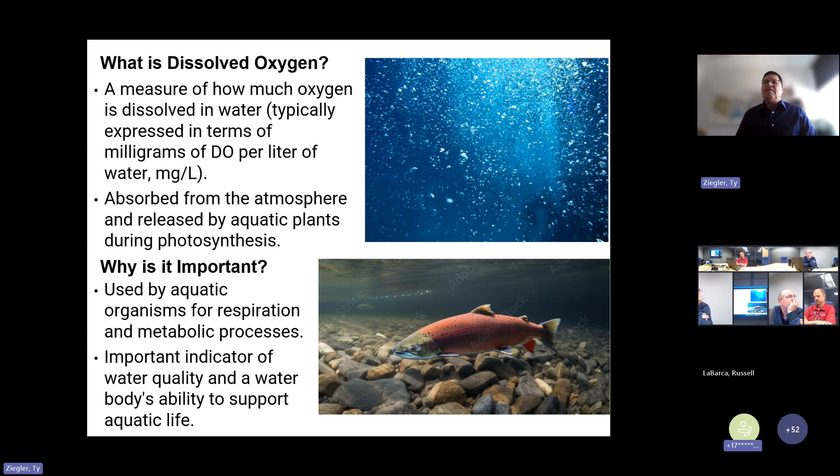It's important because aquatic organisms use it as part of their respiration and metabolic processes. It's a very important indicator of water quality and a water body's ability to support aquatic life. So with the Clean Water Act, the EPA implemented water quality standards nationwide.

States will have a temperature criteria, not to exceed a certain degrees or a certain temperature rise. Likewise for dissolved oxygen, they'll have a standard for not less than a certain milligrams per liter on an average basis. They'll have an instantaneous standard, so at no time can it drop below 4 milligrams per liter in this case. And if your water body happens to be designated as trout waters by the state, then that threshold increases to 6 milligrams per liter on both the average and instantaneous.

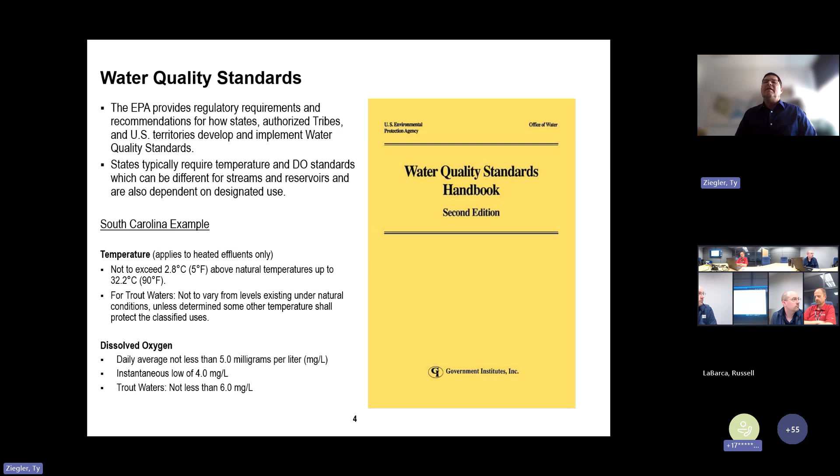Dissolved oxygen started in the summer where, at the surface, it was about 9 milligrams per liter, and it gradually declined down to about 2 milligrams per liter at the bottom of the reservoir. As the summer progressed, that dissolved oxygen gradually shifted and became less in the water column.

Temperature actually did kind of the reverse, where in the early part of the season, the temperatures were not very strongly stratified. There's a little stratification where it's warmer at the top than at the bottom. And then as the summer progressed, that temperature became much warmer in the upper layers called the epilimnion, and they were still cool in the hypolimnion.

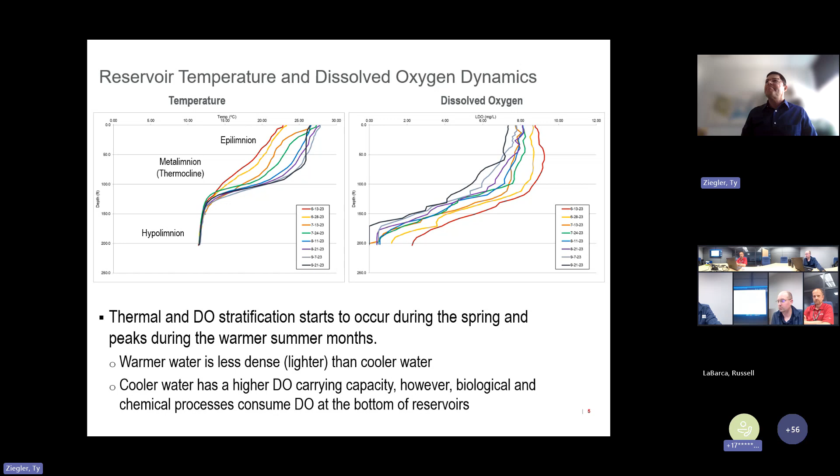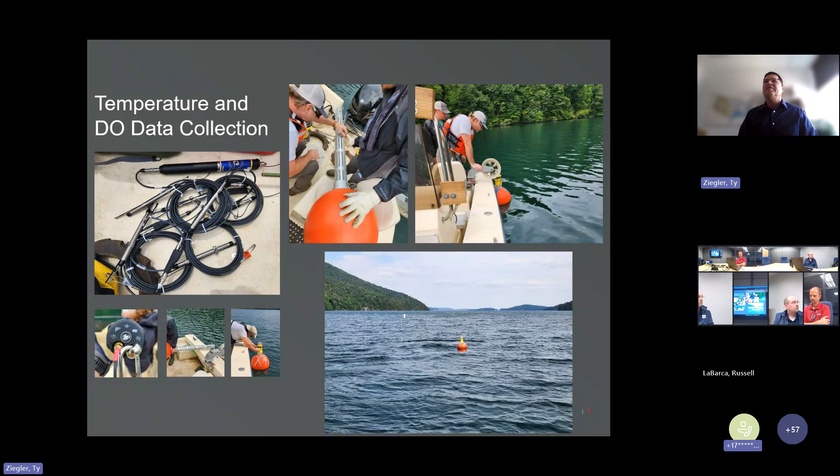So for this situation, we're measuring continuously every 15 minutes, temperature and DO at multiple locations. It's a single monitoring location, but at multiple depths at that location. So that's a pretty typical setup for how you measure or monitor temperature and DO.

Why you do this and why it's important - I'll get to how it's related to hydropower in my next slide. But what happens during the summer months is you get what we call the squeeze. You have atmospheric, solar radiation, your upper layers or your epilimnion heating up, and that's actually becoming too warm for many fish species. So fish are moving down in the water column because it's too warm in the upper layer.

But at the same time, remember the figures I showed where dissolved oxygen was really low in the bottom of the reservoir. Fish need oxygen to survive, so they're not in the very bottom of the reservoir during the summer months, if it's strongly stratified. They're typically found in this metalimnion. As the summer progresses, this top layer sinks down and the bottom layer rises. And so that's the squeeze.

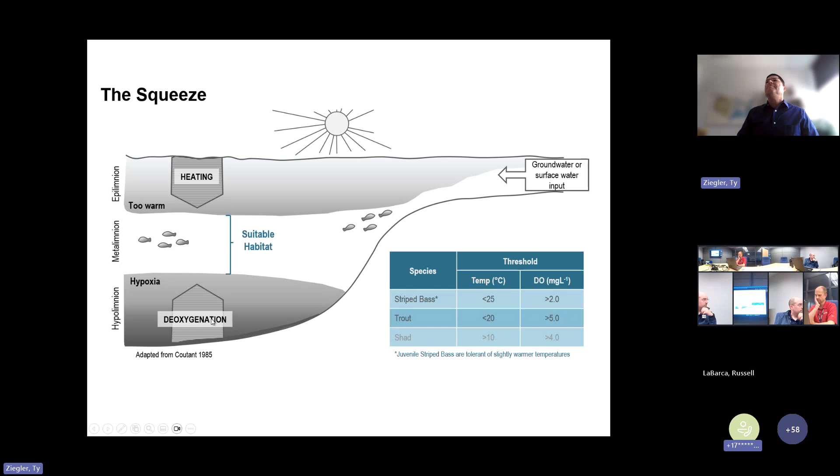That withdrawal zone may be located at a depth where you have low dissolved oxygen. So what happens is you operate the plant and you're basically pulling lower dissolved oxygen water from the forebay of the reservoir, and you're discharging that into the tail race.

And this is one of the things that is often studied during hydropower relicensing projects - what can the project do, if this is the case, to help minimize the low DO in the discharge? It's a natural process in a reservoir, and so typically you're not...

...necessarily trying to overcome the low DO in the bottom, but you're trying to either at the turbine itself, or in the penstock, in the turbine, or in the tail race, do something to improve the dissolved oxygen content.

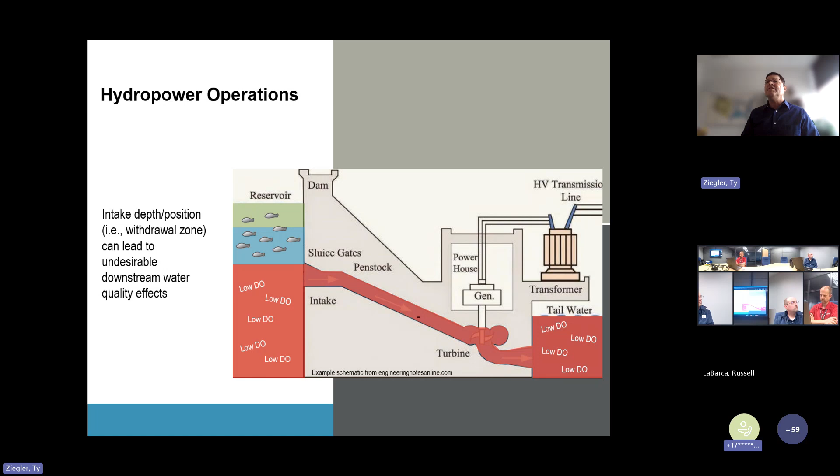I don't want to get too much into this, I know Voith is going to cover this more than me, but there are a variety of different techniques of enhancing oxygen. There are techniques where you can inject air or oxygen in the reservoir, in the penstock. You can have selective withdrawal where your withdrawal zone maybe changes seasonally as that onset of stratification occurs. There are also passive aeration technologies like weirs.

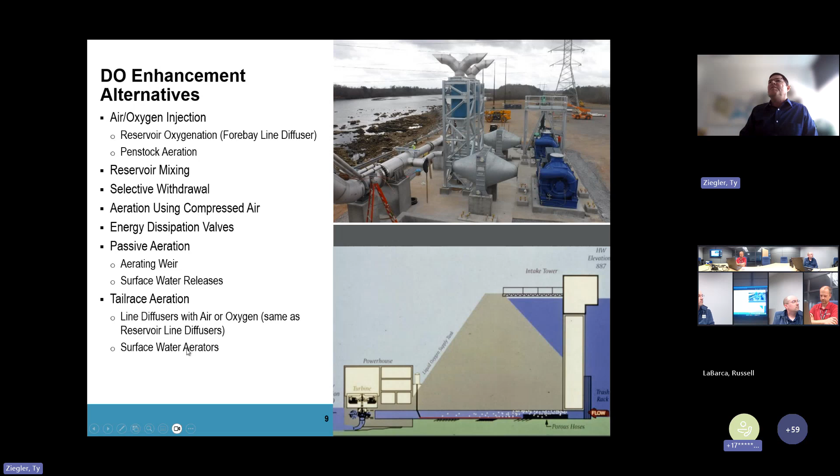For example, you could build a wall in your forebay so that the water coming into the hydropower plant has to go over the top of the wall, forcing water up closer to the surface where it can pick up more oxygen from the atmosphere before it goes into the penstock. There are also various ways of aerating in the tail race of a plant, and I have a slide on that.

I'm hoping Voith will really get into mechanical aeration within the turbine itself. I'm not going to cover this in detail, but suffice it to say, what we're trying to accomplish with a lot of these studies and engineering fixes is finding ways to introduce more oxygen into the system, rather than relying just on the surface of the reservoir.

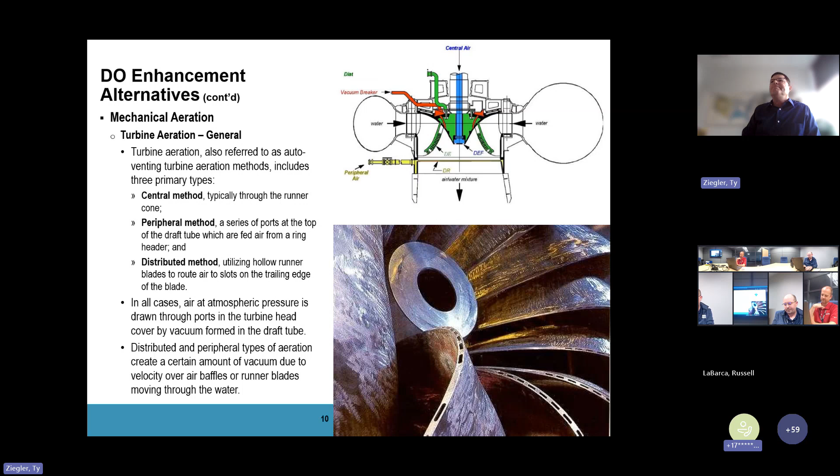And I think if Jim is on, Jim, do you want to cover the case study you have in here? Yep, I'll keep it pretty brief since there are other speakers today. Just real brief, Jim Gibson, like Ty with HDR, sitting in Syracuse, New York, and I've been doing licensing and permitting for some time now. Probably shouldn't admit the number of years, but I really enjoy doing FERC licensing.

So when we talk about DO, very few licensings don't involve some dissolved oxygen conversation. Primarily, just like Ty said, this is driven by the Clean Water Act, and depending on the species upstream and downstream, agencies are very interested in those DO levels, particularly based on downstream fish populations.

So a couple things I'd point out here. I'd consider this a case study - it's an ongoing TLP relicensing, so I won't get into names of projects or clients since it's still ongoing. But in this instance, there was a lot of conversation about DO leading into the proceeding, for two reasons. First, there's a robust trout population, both stocked and naturally breeding, downstream.

Okay, so I'm going to do a quick intro for myself as well. We're located here in the hydraulic engineering group in York, Pennsylvania. Voith Hydro is a full line turbine and generator supplier. Here in York, we focus on modernization. I've been with Voith my whole career out of college, coming up on 18 years now.

And I'm going to turn it over to my colleague, Andrew Stordahl, to give his brief bio and do the presentation here. Hello, my name's Andrew Stordahl. Like Russ, we started about a couple weeks apart from each other, so I've been here about 18 years as well. I work here in the hydraulic application group, primarily focused on predicting performance and doing application layout for bids for modernization projects all throughout the world. And so the focus today is on our aeration technology and what we can do to overcome these dissolved oxygen difficulties that we can have.

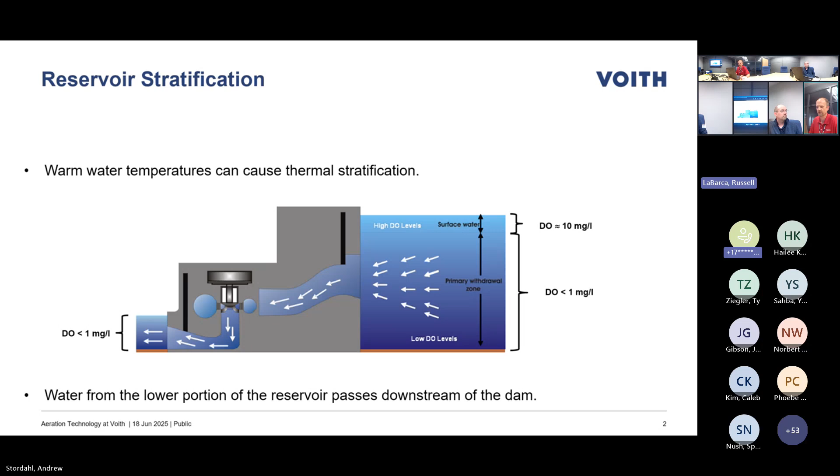As Ty was mentioning, I'll quickly breeze through this because he already talked about it. Depending on where the intake is, you can be drawing this lower oxygenated water in through the turbine, which then goes downstream, and that causes some complications. So what can we do to overcome this from a technical side? You can try to get mixing on the upstream side, you can add liquid oxygen. There are several different types of things, but Voith has come up with a technology that gets air into the water to help improve the dissolved oxygen as the water is going through the turbines and generating revenue.

As we probably know, there are low pressure regions within the turbine, particularly in the runner passageway. Its primary goal is to take this potential energy and pressure and convert it into kinetic energy to drive the generator and produce electricity. These low pressure regions occur on the low pressure side of the runner, just below that, in the runner cone, also at the exit of the runner blades, and at the top of the draft tube. So we use our CFD calculations to predict what the pressures are in those different locations. And years ago, we came up with the idea, hey, there's low pressure here, we can probably get air into the turbine in these locations, since it's below atmosphere.

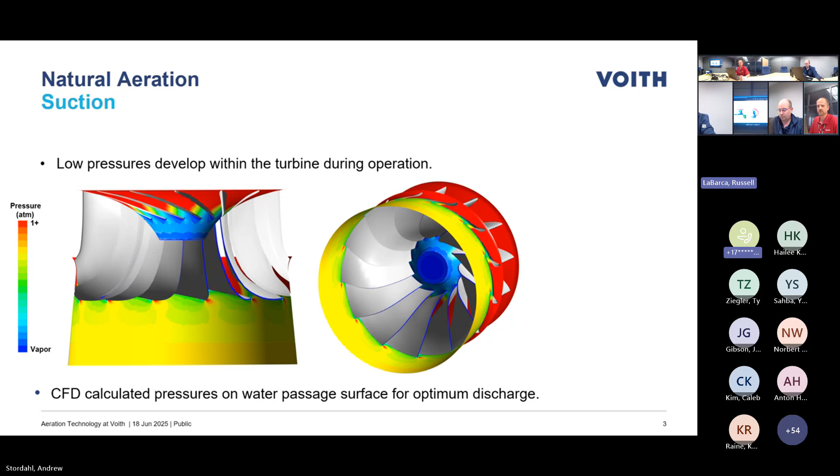So three different ways of getting natural aspiration into the machine were developed. Central aeration, which is quite common, for smoothing pressure fluctuations and vibrations at part load operation. We can make that a little bit bigger and shove some more air in there, so that's an option. Also at the top of the draft tube cone, we can add a peripheral system. There's a little chamber with a manifold. This also works with axial flow machines, and can take advantage of that low pressure region.

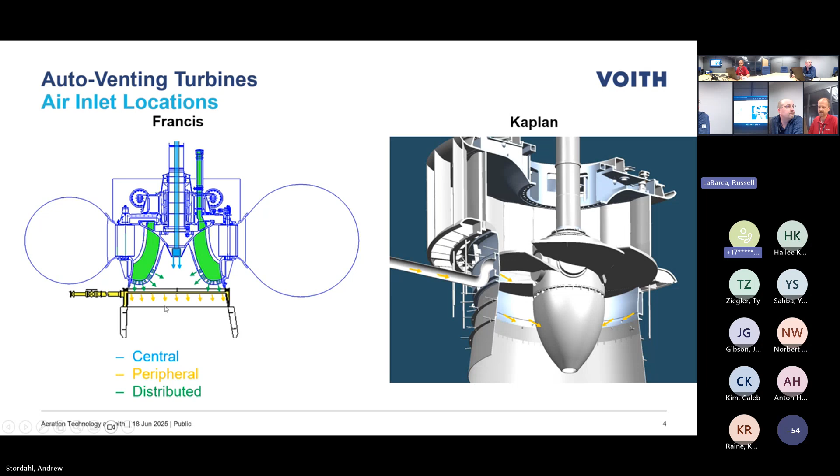Voith developed technology to actually get a distributed system, so the air is going through the runner blade passageway, and then you get an advantage of taking advantage of a low pressure region, but also distributing that air throughout the entire water column. With the central system, it really stays in the middle of the water column. With the peripheral, it really likes to just follow the wall of the draft tube, and yes, there's secondary flows, you get a little mixing that way. But with the distributed system, it works across the entire turbine operation range.

At part load, when you have a lot of secondary characteristics going on in the draft tube, you're going to get a lot of mixing. At the peak, when the water is moving really nice and smooth, it's all quiet, you're still getting a lot of mixing because the air is being introduced throughout the entire water passageway.

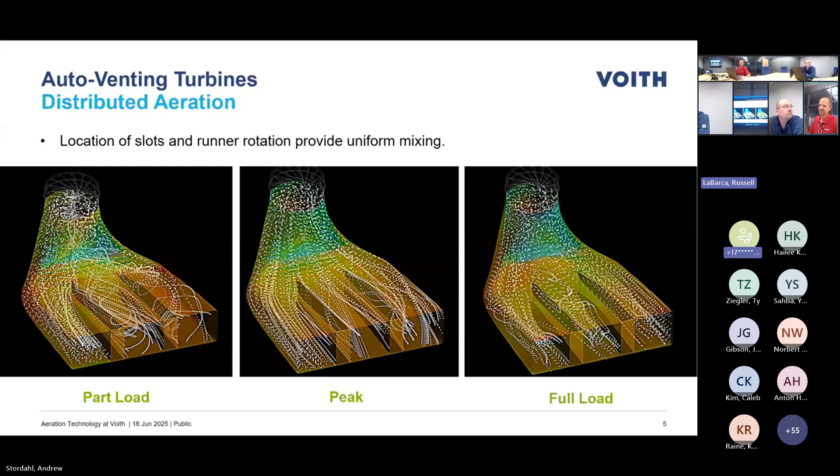And at full load, same thing. You get high velocities and a lot of drawing pressure, but you need a lot of mass flow to compensate for the very high flow rates going through the machine. With a distributed system like our aerating runners, you get that distribution, and you need that concentration because it's just a mass transfer problem.

Voith's aerating technology comes through the discharge edge of the runner blade, because that's the lowest pressure region in the entire machine. So you get a lot of suction or drawing pressure to pull in the airflow. Because this is along the discharge edge of the runner, you get distribution radially through the water column, and since it's spinning, you get it circumferentially throughout the entire water column.

And so that mixing really helps distribute the air so you can get a lot of surface to air contact to get that mass transfer to happen.

It doesn't block the air flow passageway in any way because it's at the discharge edge of the runner blade, which is always there. So it doesn't really have a meaningful impact on the turbine performance, even when you're not needing to aerate and increase dissolved oxygen. It is a real benefit to the operator that you don't have any problems.

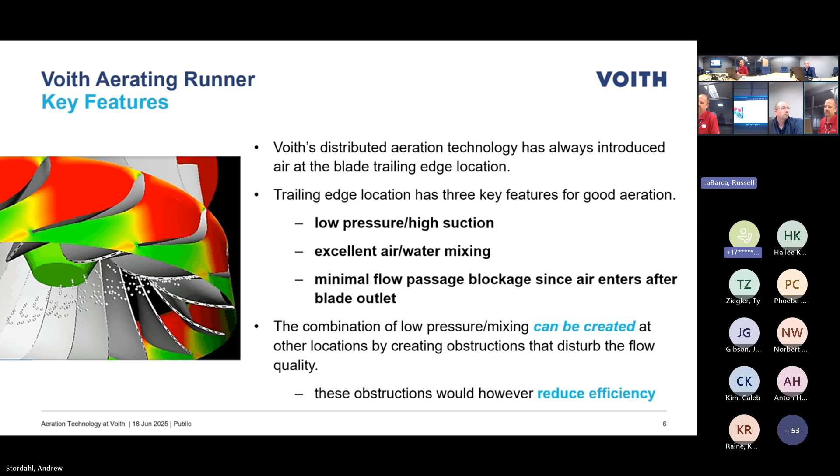You could introduce things into the water passageway in different ways. There are all kinds of other aeration devices that insert something into the water column to get air into these low pressure areas. But they reduce efficiency when you're not aerating because you've got an obstruction in the water passageway.

So Voith has been doing this for a while. We have around 33, at the last count, aerating runners in operation, anywhere from about 120 to almost 200 inches in diameter, heads anywhere from 50 to almost 300 feet, and a big range of output of these machines as well, from 7 to 127 megawatts.

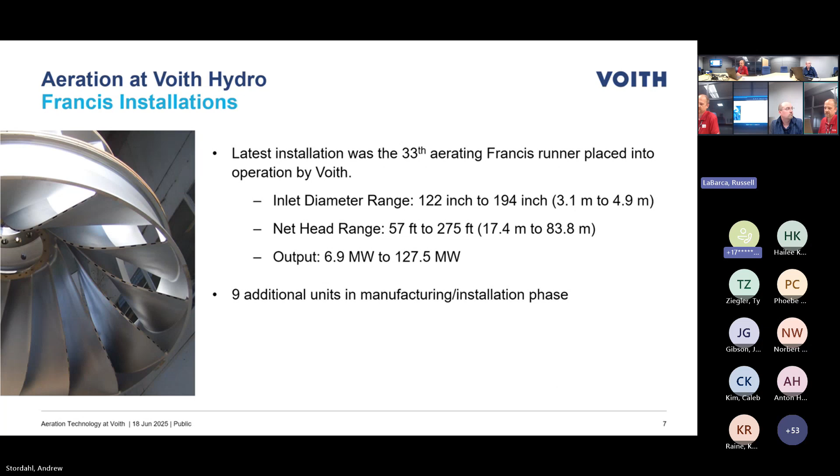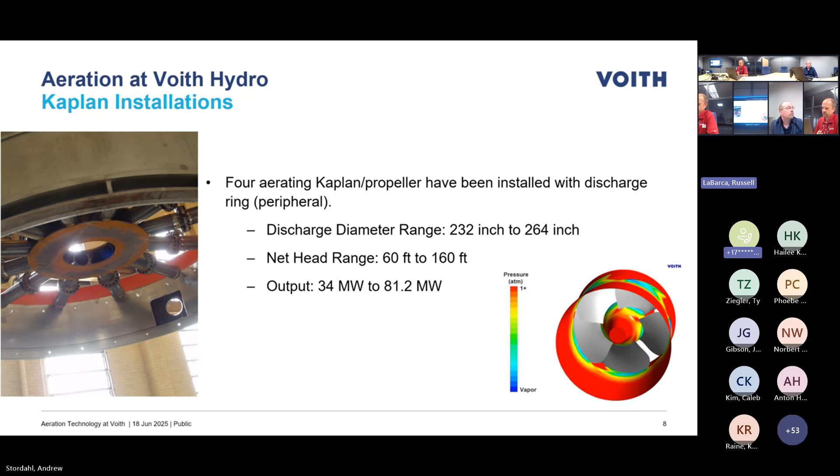We have a few more that are out in the shop and being installed in the field as well. We also have a couple of Kaplan peripheral systems that we've put in over the years. While those are a little less common because of the complication with that, we still have done that system, and they're operating quite well today.

Voith has been in this business for a long time. We've been making hydroturbines for over 130, 140 years or so as a company, and we were involved in one of the first auto-venting turbine designs at TVA's Norris Dam back in the early 90s.

Since then, we have installed a whole bunch of machines, and we've really been continuously developing this technology and making improvements. In the mid-2000s, we started doing better computational modeling by using the discrete bubble model to predict what the dissolved oxygen is going to be, so we can design around that and know before we build, design, and install what we can expect.

We have been able to increase the head at which these machines have been operating up to about 275 feet. We've combined this with minimum stream flow requirements such that we have a design out there that operates at a significantly reduced flow to comply with FERC licensing for minimum stream flow, while still adding dissolved air and dissolved oxygen at those types of conditions.

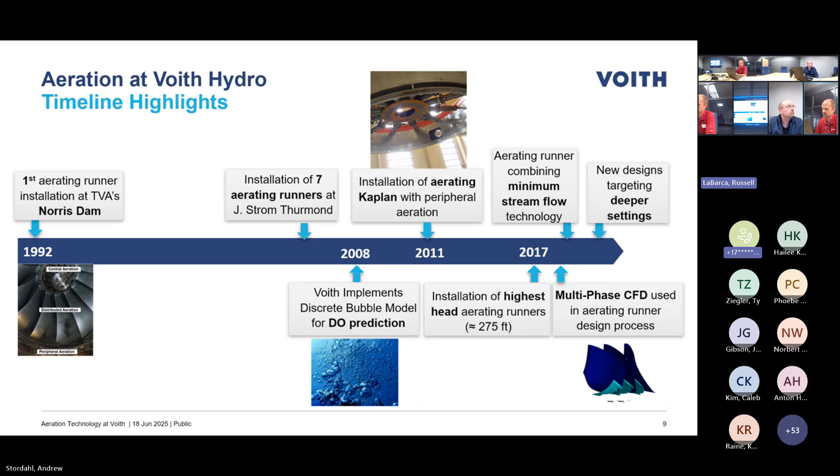We've been doing more multi-phase CFD to help with our prediction process, and we've also been making other design enhancements to develop for deeper turbine settings, because the relative position of the tailwater compared to the unit centerline is a real driver in terms of the drawing pressure that you have. So we've made improvements to accommodate that as well.

So in the modeling, the airflow is obviously important. The more air you get into the runner through the discharge edge of the blade, the more dissolved oxygen concentration you can improve. So we calculate the pressure at the air inlet location from CFD.

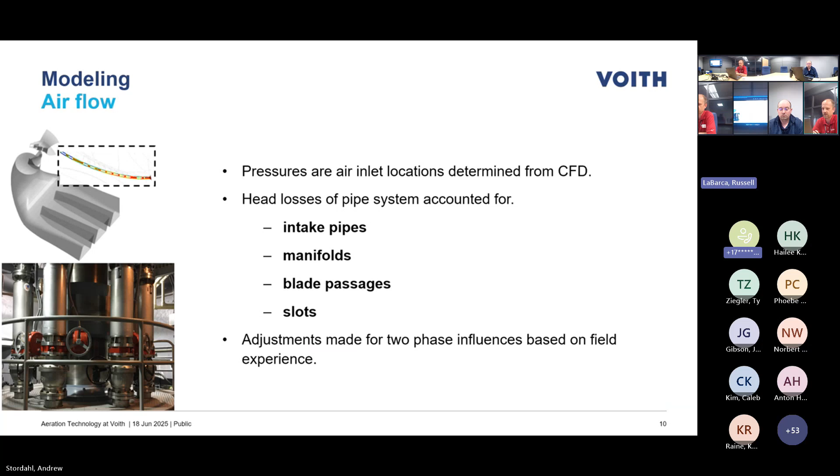We also need to account for all of the flow losses in the system, considering the intake pipes, any manifolds and things like that in the head cover region, the air going through the blade passage and in the slots. And we also have a lot of experience comparing the air pressures we've calculated versus what we've measured in the field, so we do have a bit of a correction to take into consideration as well, because things do get complicated when you get an air-water interface.

Ultimately, we need to figure out how much of this mass transfer is going from bubbles into the actual water, because that's what we're really interested in. And so the discrete bubble model was developed to predict the dissolved oxygen uptake.

It accounts for the different site conditions, such as the size of the draft tube, how far the air bubbles are going to travel, the mass flow of air, the size of the bubbles, and the different operating conditions of the turbine—whether you have full load, peak, or somewhere in the part load region. And of course, the turbine geometry is important as well.

So what we do is basically develop a computational model of the entire passageway and track an individual bubble as it goes from the air inlet location all the way through the draft tube and up to the surface. That way we can integrate that for different size bubbles based on the different operating conditions and calculate what we get in the tail race.

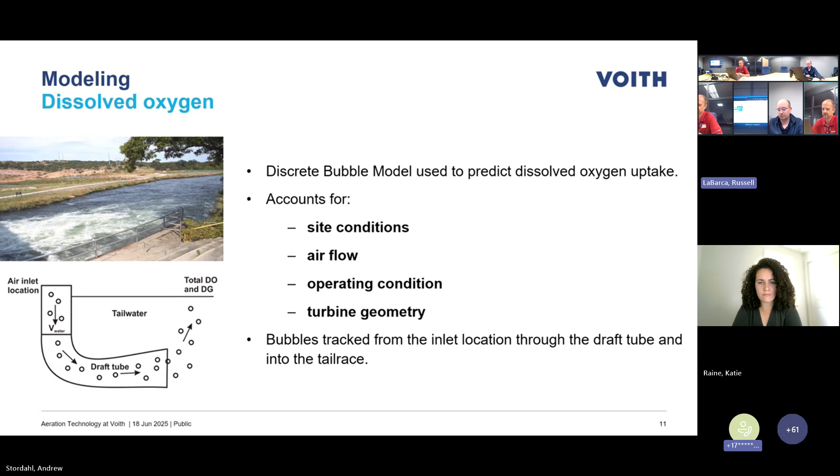We've done this a lot of times over the years, so we have a pretty good data set of experience, and we're confident with our calculations.

Sorry to interrupt, just want to do a quick time check—about a minute and a half left. Yep, I've got my last slide. Perfect, thank you.

We're confident enough in our calculations that we've been making guarantees in dissolved oxygen in the tail race, assuming we have a good understanding of the water temperature, the incoming DO, and tailwater levels, because those are big drivers in terms of what the system is capable of doing.

We guarantee efficiency with the air valves closed, which is basically just like any other turbine. We can also guarantee the efficiency while aerating, because there are performance impacts from injecting fairly large volumes of air into the system, and then also cavitation performance.

Injecting air into the system can help with other types of operating conditions too. Just like we'd have a central air admission system to help smooth part load operation, these dissolved oxygen aerating runners can do that sort of thing as well.

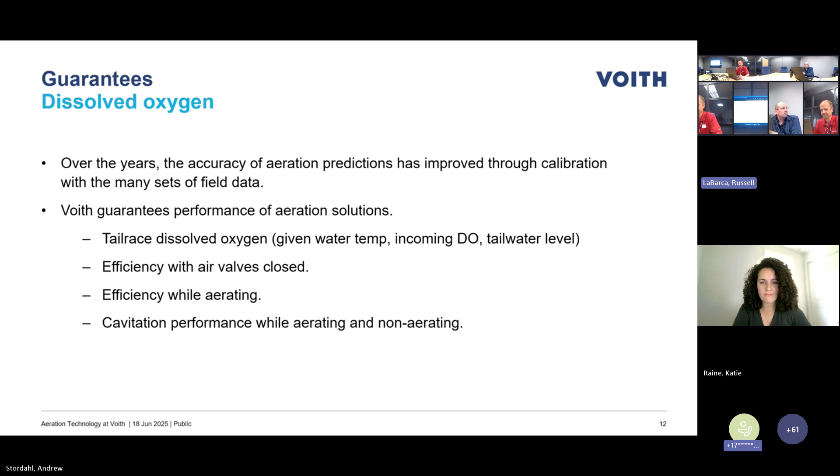So that's my last slide. I think I'm right about on time. Hopefully. Yep, you're perfectly on time. I shouldn't have even said anything. Thank you so much, Andrew. And it's all hopefully good. You're welcome—you're available to stay on for a few extra minutes too, for the Q&A at the end. Yep, for sure, we'll be here.

Okay, good, thanks. So our last presentation, but certainly not least, is going to be about where the rubber meets the road. We've talked about what DO is, how you study it, and let's say it ends up in a license. Now we've talked about some of the tools that can help manage DO problems at a site—so how does that look at an actual facility?

Joyce Foster is the Director of Licensing and Compliance with Eagle Creek Renewable Energy and is going to be speaking to just that. So Joyce, I'll turn it over to you.

Thank you. I'm trying to present my slides, so hopefully that's working. And you guys can see those, okay? We can see it. Oh, excellent, excellent. Just let me know if there's something wrong.

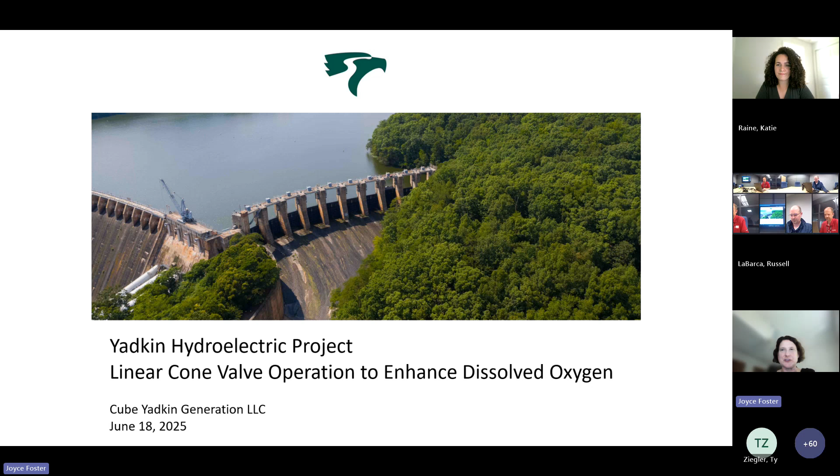So again, I'm Joyce Foster with Eagle Creek Renewable Energy, Director of License Compliance. I'm physically located in Virginia, but I cover projects from Southern New York to North Carolina. My quick bio: I've worked at an NGO, a state regulatory agency with water quality monitoring, and as a consultant for hydropower relicensing, and now I'm on the owner side. So I've kind of seen and done it all, I would say, and I have an interesting perspective when it comes to relicensing at times.

So I'm just going to kick off. We wanted to highlight a project, the Yadkin Hydro Project in North Carolina, an innovative approach to DO enhancement that was implemented by our CEO, who's an engineer and innovator, and challenges us every day to innovate on new things and to not do things exactly the way we might have been told to, but to question everything.

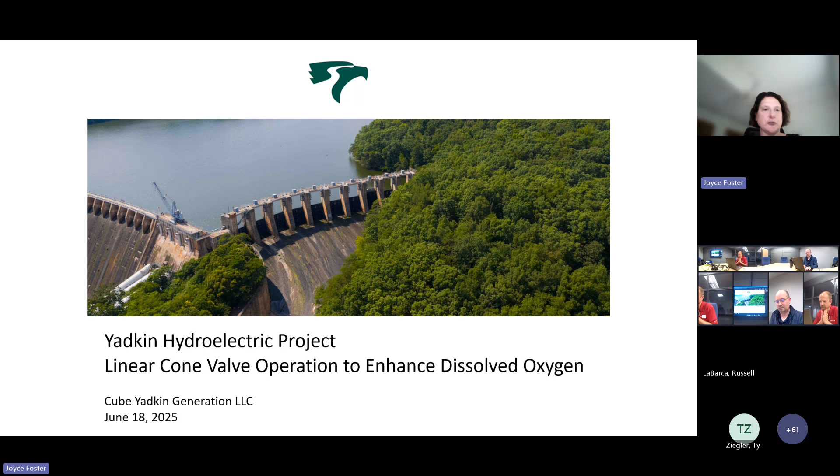So this is going to focus on the High Rock and Tuckertown facilities, this linear cone valve operation that we've been using to enhance DO for quite a few years now. Just to give you a high level look at improving dissolved oxygen at the project. Dissolved oxygen levels at High Rock and Tuckertown tailwaters periodically fall below the state standards in summer and fall.

HDR talked a little bit about those state standards. The North Carolina Department of Environmental Quality, formerly Division of Water Quality, in our 401 Water Quality Certificate, which is a requirement in our license, actually required us to do DO enhancing technology at the project. We have a series of 4 reservoirs and dams at this project, and High Rock and Tuckertown are the 2 uppermost plants. We have to release and look at the standards at each of the tailwaters and also what we're releasing into the river downstream of our project.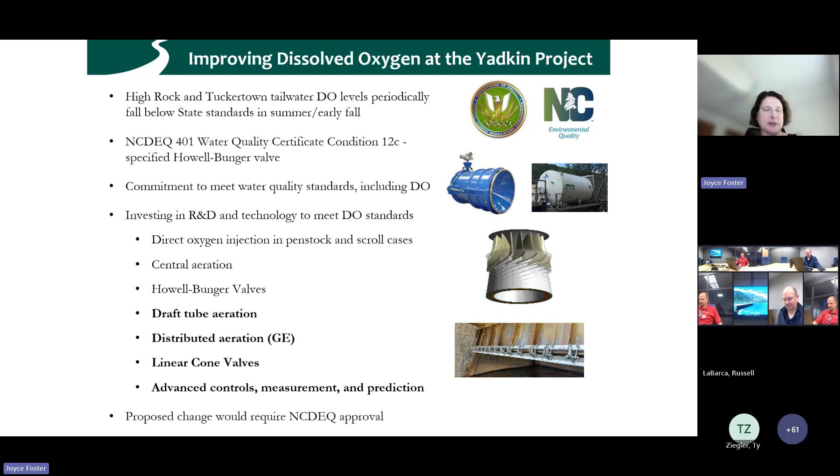The water quality certificate was very specific. It specified a Howell-Bunger valve. I don't know the history behind why that was specifically specified at the time. But when we looked at starting to implement the license, we wanted to still meet water quality standards and dissolved oxygen, but our company was interested in investing in R&D and technology to meet DO standards. So they looked at a lot of different technologies that were out there, looked at what might work, what might be suitable here at this particular project, and evaluated those at a high level.

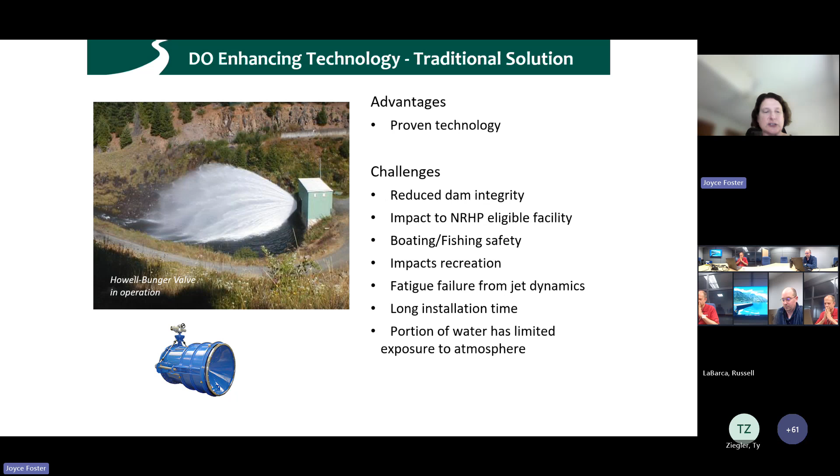They looked at traditional solutions, which proved the advantages of being proven technology, but there were challenges, particularly with the Howell-Bunger valve related to reduced dam integrity that they were concerned about. Also boating and fishing safety. The tailwater areas are very popular there for fishing. There were impacts to recreation, potential impact to National Register historic places if that's part of your project, and also other things like long installation time and other limitations to that technology.

So our folks looked at doing an alternative, and they looked at different evaluations, different technologies. One of the things they looked at and decided to go with and develop for the project was this linear cone valve. There are advantages to that. In particular, it's easy to install on existing spillway gates, utilizing existing gate motion and forces to adjust the valve settings. The valves can be reconfigured to self-regulate flow or vary oxygenation. It was a 20 times reduction in installation time, safer for downstream recreation, and maintains the integrity of the dam.

So our folks were really interested in pursuing this. We discussed it with the regulatory agency, NCDEQ in North Carolina, and looked at whether this would be something they might approve as a replacement or in lieu of the Howell-Bunger valve. The challenges with this was it's a new solution. It had limited field experience at that time, and it was limited to facilities with spillways, such as many of the facilities we have at the Yadkin project.

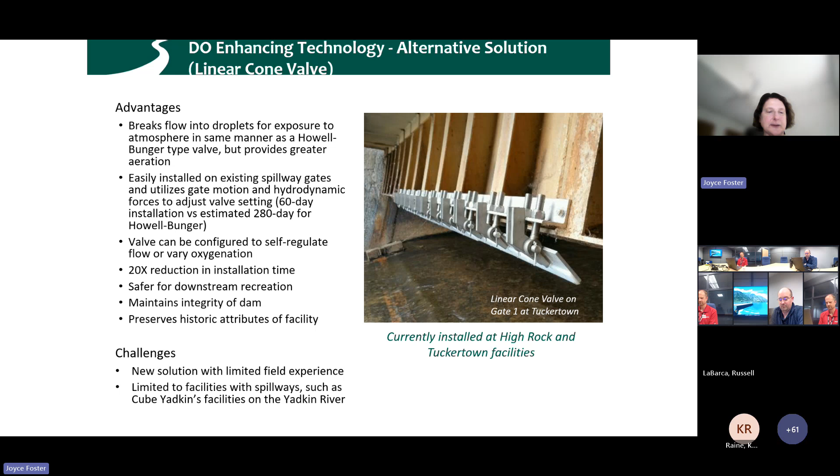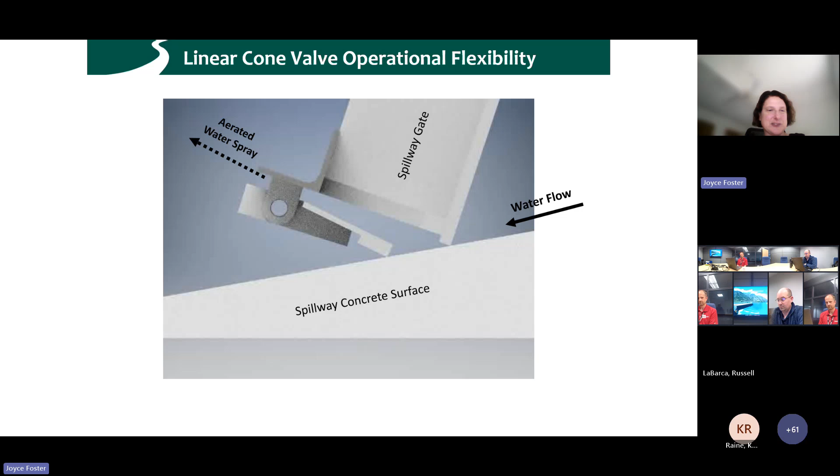So this is just kind of a little graphic that shows you a little bit about the operational flexibility. We do have a video. We didn't have time for that today, but if anyone's interested, it used to be on our website, but apparently it's no longer there, but we can certainly give you a link to that if you're interested.

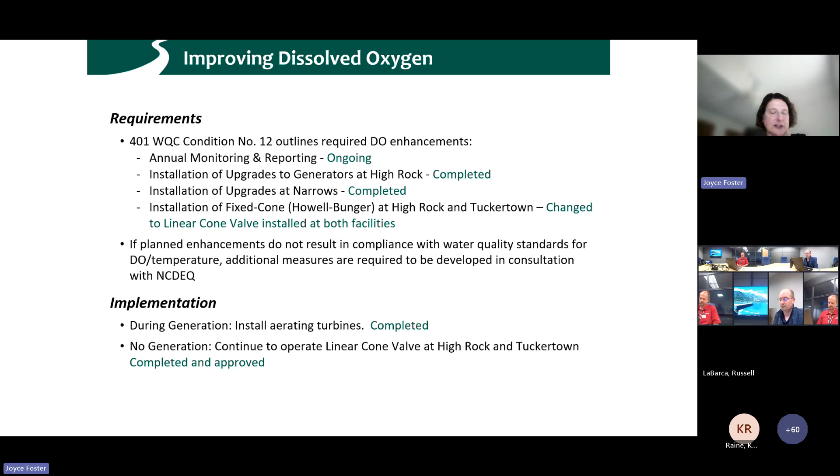So really what we were looking at doing was improving dissolved oxygen using various methods and looking to meet all of the requirements in the 401 water quality certification. We did also some upgrades to generators, other upgrades, installation of these linear cone valves. The agreement was with DEQ that if those planned enhancements did not result in compliance with the water quality standards for dissolved oxygen, additional measures would be required. So during generation, we installed aerating turbines at High Rock, all 3 units there, to help during generation periods. During no generation periods, we worked on operating and installing these linear cone valves at both High Rock and Tuckertown.

So once all of these enhancements were made, we did testing with the state, and there were some challenges. There was hyper-eutrophication upstream. The DO standard there in North Carolina is a 4.0 mg/L instantaneous and 5 average DO standard, a daily standard. DO enhancement requirements are from May to November, and we do monitoring during those periods. The standards had to be met during periods with and without generation.

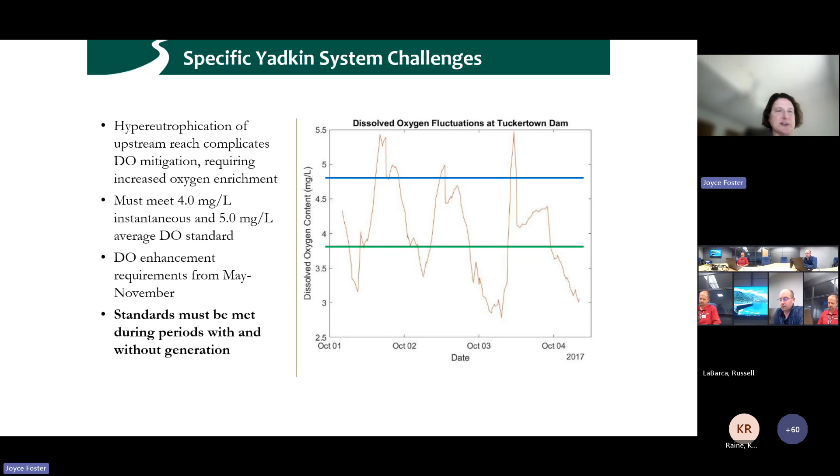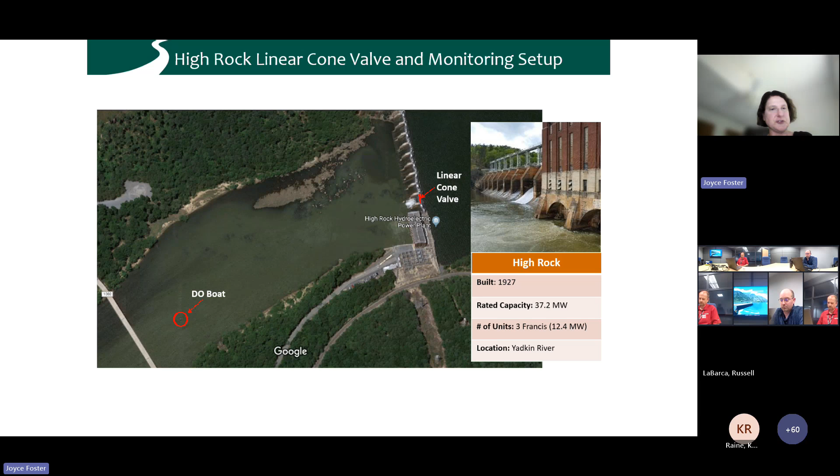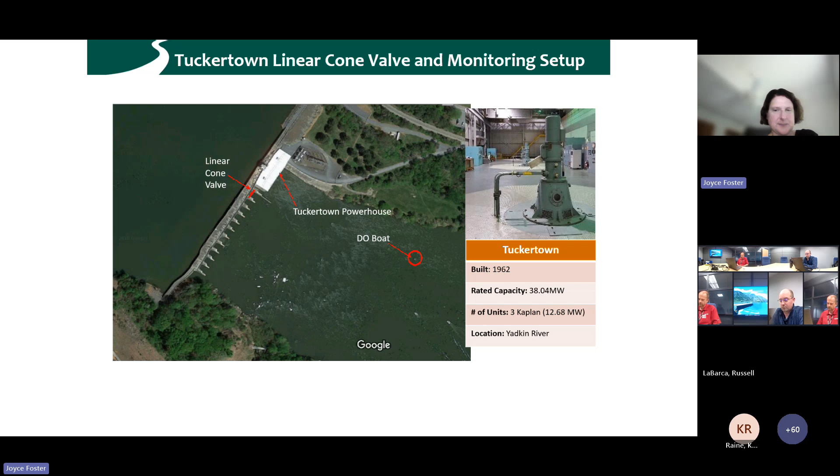The dissolved oxygen boats are kind of interesting structures. I think this was devised by our CEO at the time. They're basically a floating sensor package that provides real-time monitoring of water temperature and DO. The design was revised in 2018 to improve stability and reliability during high flow events. They're occasionally removed only during the threat of extreme hurricanes or extremely high flow events forecasted. They have sensors, onboard power supply, solar power and batteries, plus communications and onboard data storage, wirelessly updating to our server every 10 minutes. Operators can also connect and view live data from the sensors.

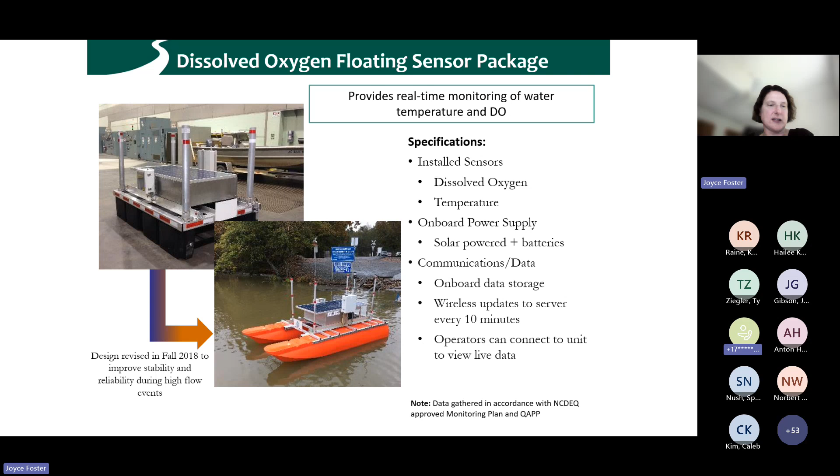So I mentioned that we were doing the testing. That went on for about a season of dissolved oxygen, an entire season, looking at what those values were, testing at various operations and multiple settings, and collecting a number of operational data points. I know we're getting a little short on time, so I'll breeze through this. But what we did find was the DO conditions noticeably changed with operational conditions.

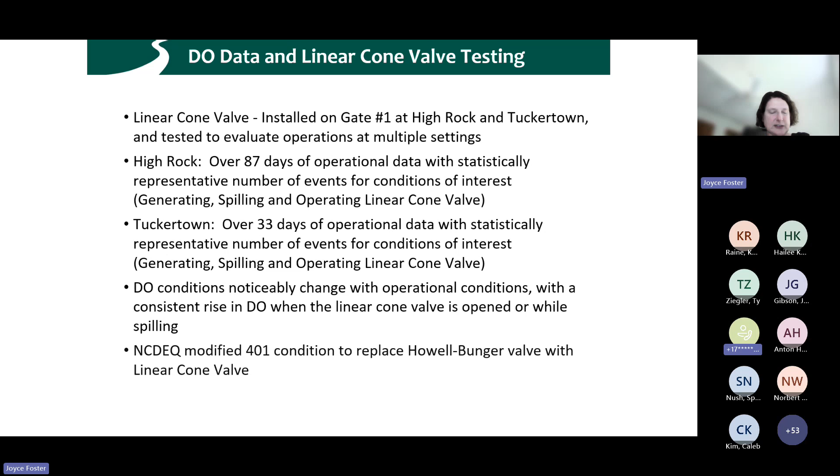On the next slide, we really look at implementing this combined solution to address generation and non-generation license requirements, while accelerating DO enhancement implementation and preserving dam integrity.

What we found was that the linear cone valve resulted in consistent increases of DO, demonstrating that the system improved DO when turbines were not in operation.

Through all of the measures that were implemented, we're meeting the DO standard. At High Rock Dam, we typically meet the DO standard most of the time. Below Tuckertown, pretty much 100% of the time. And coming out of the entire project system, it's pretty much 100% of the time, 99.99% typically. So that's an incredible improvement on dissolved oxygen there.

And we did have to go to DEQ to modify our 401 water quality condition. So I think we must be at time here. That's pretty much the bulk of my slides, but I'll stick around and answer a few questions if anyone has any. Thank you very much for your time, appreciate it.

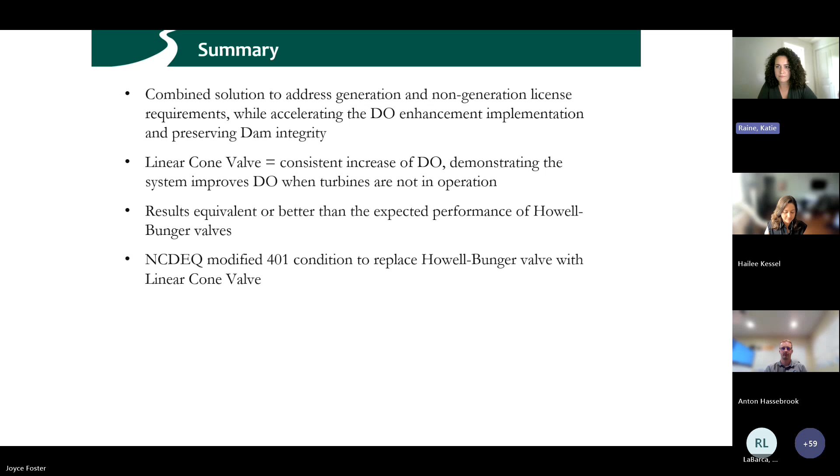Okay, Katie, I've got a question for Jim and Ty, our first presenters. Thanks for the presentation - just a quick question, because you mentioned in the Northeast that it was more common to do quarterly dissolved oxygen monitoring rather than continuous monitoring. I'm curious how the shift from quarterly to continuous - how have you seen changes in the data with a larger data set, or do you think the quarterly was well represented? Just curious.

I think there's a little bit of pros and cons here. Part of this is improvement in technology - we're getting beyond now. I mean, HOBOs are pretty cheap, and even some of the more robust technology, like Ty was describing, is pretty readily available. But I think there's a number of states in the Northeast where for years the idea of just going out doing some grab samples, maybe 2-3 times over the course of a month, was acceptable. I think once a couple licensees agreed to doing continuous, it just became the trend. So then with regard to the data...